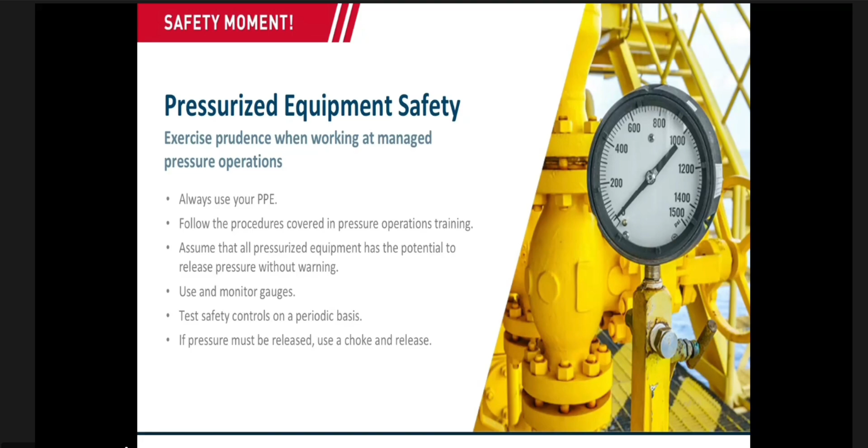So this is from my side about the pressure equipment safety. If you want to add something, please feel free to add, or else we'll go for the SIL overview. So would you like to share the project scope, Eldin? Yeah, so you may please feel free to share your screen so that we can quickly go for the scope of the day.

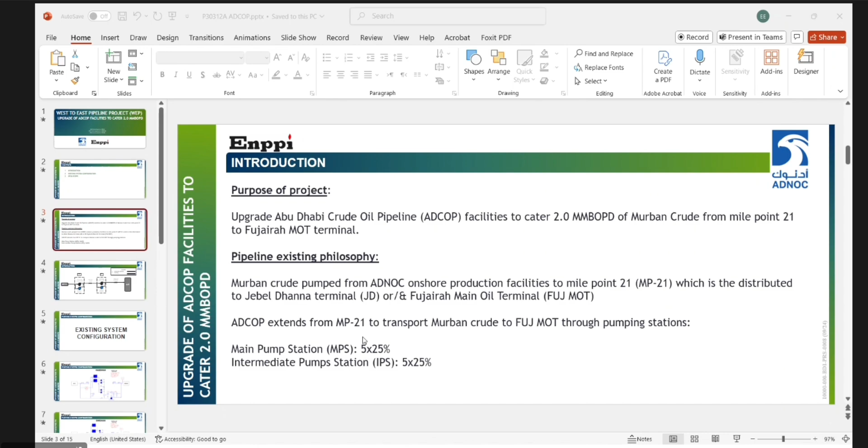Let us start with the ADCOP project. The objective of the project is to cater 2 million crude from MP 21 to Fujairah through pumps from MPS station and IPS. We have existing pumps, 5 pumps for operation and 1 standby. Now, to increase the capacity, we need to add further pumps at MPS station and IPS station. This is the blue pump. To handle our objective capacity.

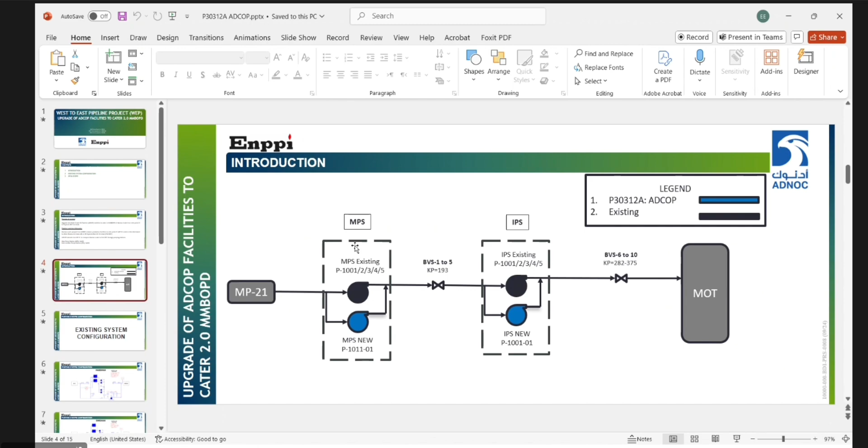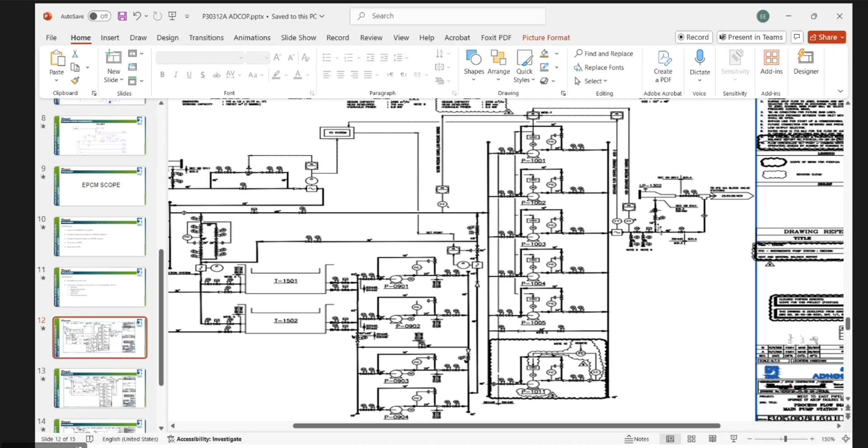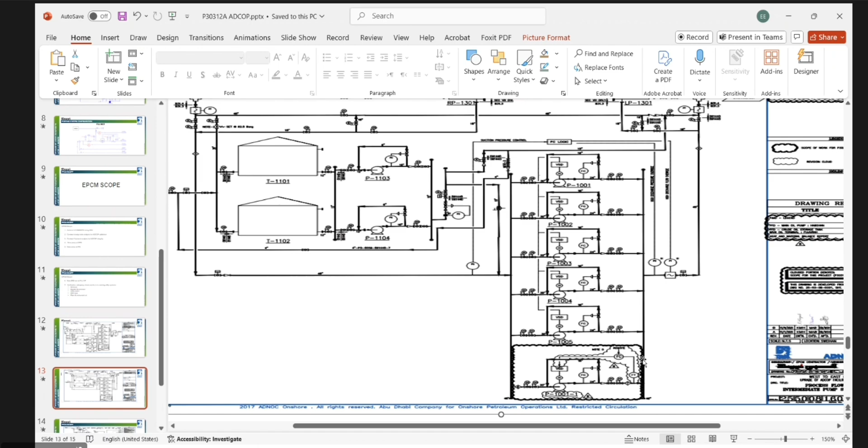This in brief is our scope. If we go to the BFD, now here we are in the MPS. We have 4 pumps existing, 5 pumps existing, and adding 1 additional. We have suction header and discharge header. All this existing, the crude will go to the IPS station through the ADCOP pipeline, which is an existing pipeline. And now we are in IPS station, after crude comes from MPS. So in this setup, we have an existing storage tank and relief for the storage tank. This additional pump is for IPS. The crude will go to Fujairah through this ADCOP pipeline. This in brief is the project.

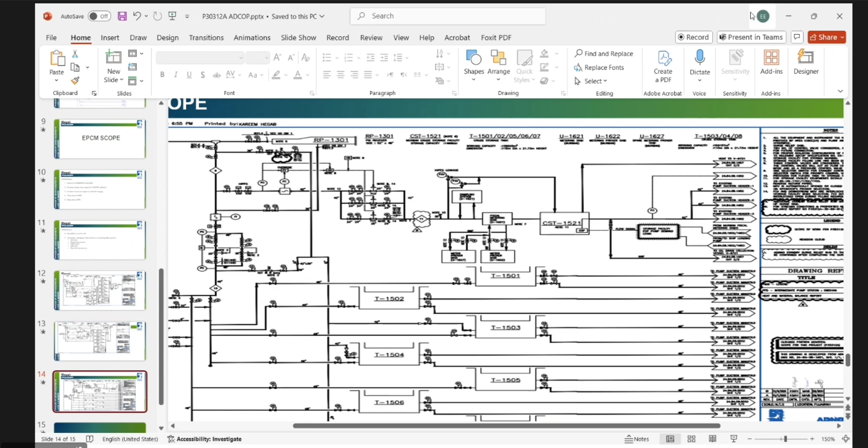Okay, thank you, Ajaluddin. I think you have given a very short and simple description. And we will take your help during the workshop regarding the SIL and the purpose of the SIL during the workshop. Thank you very much, guys.